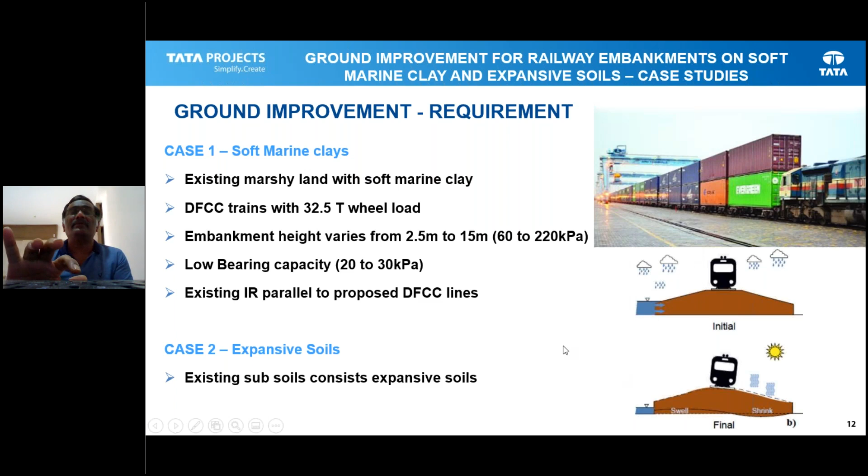The second case is how to handle an expansive soil. The soil is very hard during the summer, and in the rainy season it becomes soft and starts showing expansiveness. How to handle that clay.

One project we are presently working on is the DFCCI project in the Mumbai area, connecting from JNPT to Baroda across three stretches. This is around 104 kilometers where this red line shows the railway track moving on the ground. The entire Mumbai area's general soil profile consists of very soft marine clay followed by basalt rock.

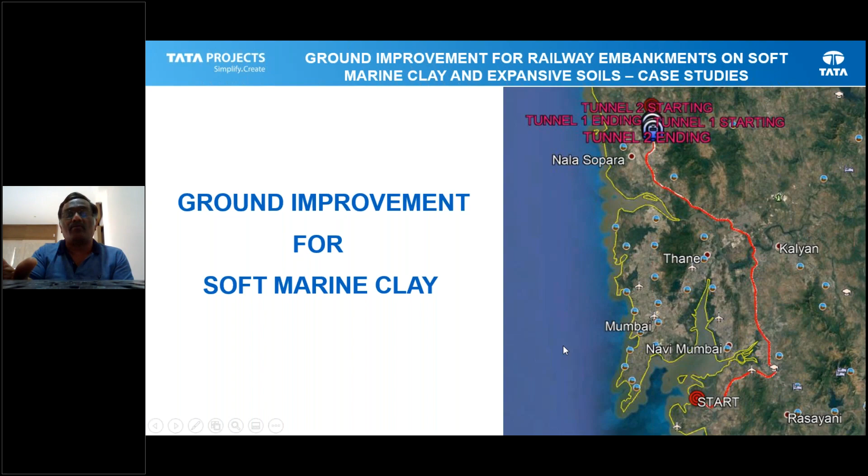The embankment heights we are talking about vary from 2.5 to 15 meters. The load coming from the embankment is around 5 to 15 ton per meter square, whereas the ground strength is not more than 2 to 5 ton per meter square, or 50 kilopascals.

So we found out what are the different methods of ground improvement available for us to handle the soft clay: ground improvement without admixtures, ground improvement with inclusions, and ground improvement with grouts and chemical admixtures.

As you are aware, without admixtures means either replacement, because we don't add any other components inside the ground, or preloading with PVDs, or vacuum consolidation.

Ground improvement with inclusions means we add additional material into the clay, thereby improving the shear strength and reducing the settlement. That is stone columns, sand compaction piles, soil nailing, and geosynthetics.

Ground improvement with grouts and chemical admixtures - which now, of late, we are getting these technologies in India - includes chemical stabilization, deep mixing, jet grouting, etc.

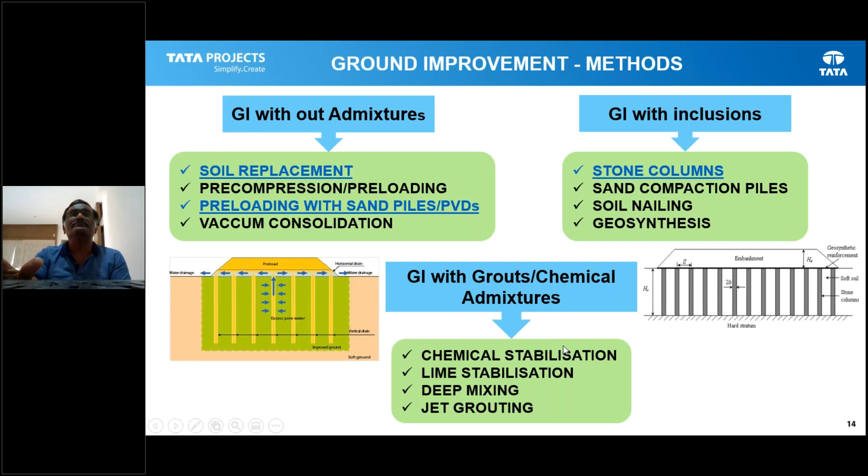So what is the method we adopted in marine clay? If the soil layer thickness is less than 2 meters, we have removed that soft clay layer and replaced it with good SQ1 material, which is a granular material.

If the depth of the clay layer is more than 2 meters - and one of the problems here is that our railway line of the DFCCI, the dedicated freight corridor track, will run parallel to the existing Indian railway line - the distance between the two tracks will not be more than 5 to 6 meters, and because of the space constraint it has to be as close as possible.

In that case, we have to go with a method that does not allow the existing railway track to settle. So we have chosen the stone column.

Where the DFCC track is going through a detour area where there is no Indian railway line, we have chosen preloading with PVD drains - that is, sand drains or wick drains.

So we have handled around 80,000 stone columns of length varying from 5 to 15 meters, and 4 lakh meters of PVDs varying from 8 to 15 meters.

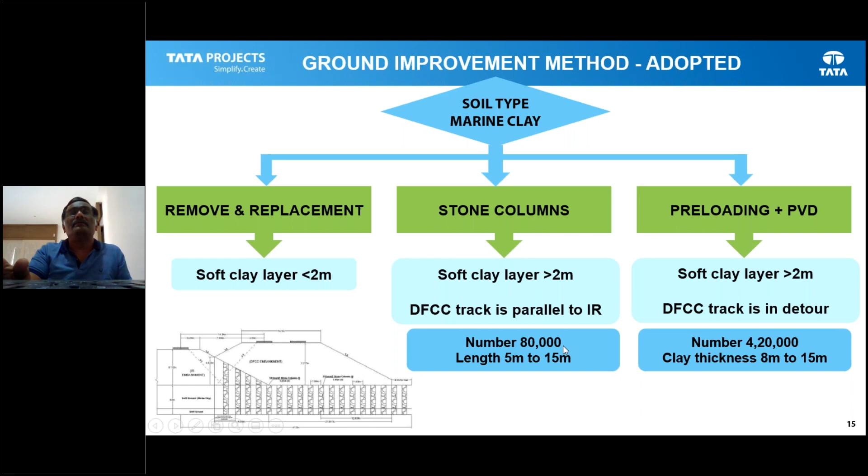So how did we design the stone columns? The entire process is split into four parts.

One is getting the subsoil profile from field investigation and laboratory testing. Then doing the design procedure for the stone column layout based on the loading coming from the railway track. And then next is the construction procedures and confirmatory testing, to check whether whatever design and execution was done is performing as per the requirement.

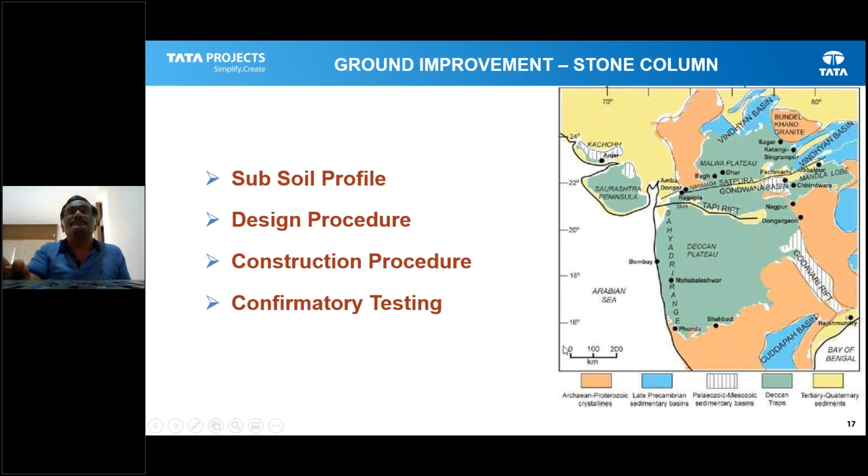Basically for soft clay, we know the property required is cohesiveness - the C value of the soil, cohesion of the soil. The shear test gives the cohesion directly in soft clays, and we can also get the C value from the N value. So as per the bid and tender requirements, we need to do one borehole every 250 meters, or at every structure location.

So we have done extensive investigations - almost 4 boreholes per kilometer, around 400 to 500 boreholes in total, and 50 vane shear tests were conducted.

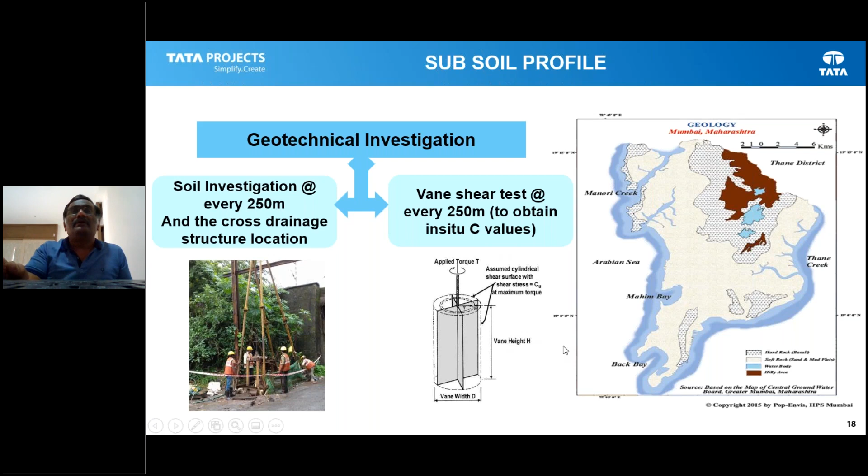The entire data is plotted horizontally based on the chainage - these are the borehole information showing N values, clay content, swell pressure, liquidity index, dry density, etc. You can see that the circled color shows the soft clay patches along the entire 100-kilometer stretch.

So the improvement is required only in the three areas where the soft clay layer is more than 2 meters, the N values are very low, and the C values are less than 20 kilopascals. The green line is the investigation bottom, and the boreholes are shown in red color. This is how we plotted the entire 100-kilometer stretch and identified which areas require treatment.

Yeah, it's just taking some time.

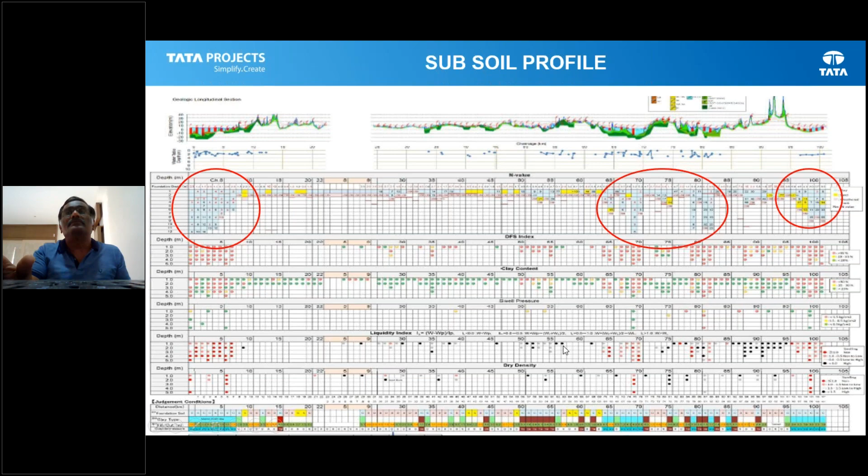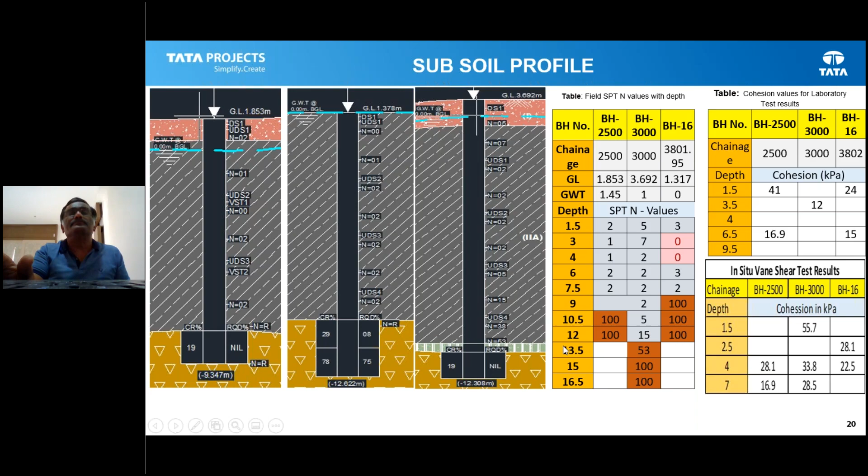Since the entire stretch is 100 kilometers, to arrive at the areas precisely where treatment is required based on the loading coming from the embankment, the ground profile, and properties of the soil, we have made a flow chart for the soft ground treatment. So when we should go for a replacement, when we should go for a stone column, when we should go for PVDs - this flow chart helps designers choose the type of treatment required based on the above said parameters.

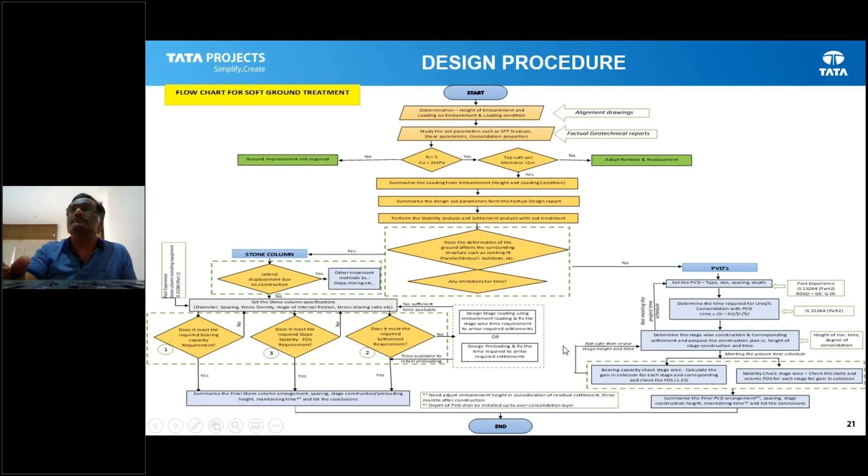Okay. So the entire design procedures are based on the RDSO guidelines GE G5, also IS code 15284. This is the stone column. The entire design procedure and guidelines are given in this code. RDSO also gives the guidelines based on this code, and some information is taken from overseas codes.

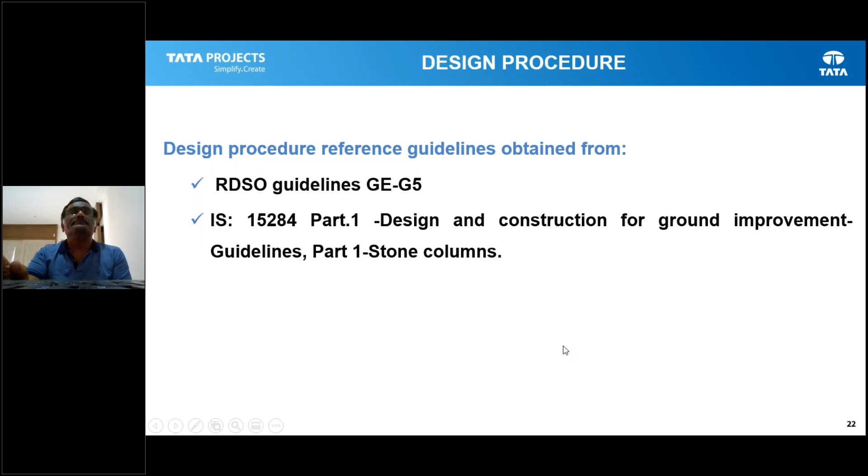So this is the typical embankment for any railway loading. 13.86 meters is the minimum width required for the two tracks going parallel. Below the rail track, we have ballast, below the ballast a blanket, then subgrade - SQ1, SQ2 as we call it - then the embankment material. The top thickness will vary, 1.6 meter will be the blanket and subgrade, and above that there will be rail height, some 350 to 400 mm.

So the entire loading calculated from the live load from the track, ballast, blanket and subgrade load comes around 56.4 kilopascals for a 2.5 meter height of embankment. If the soil is able to take this load, there will be no treatment required. If the cohesive values or shear strength parameters are not supporting this load, we go for the treatment.

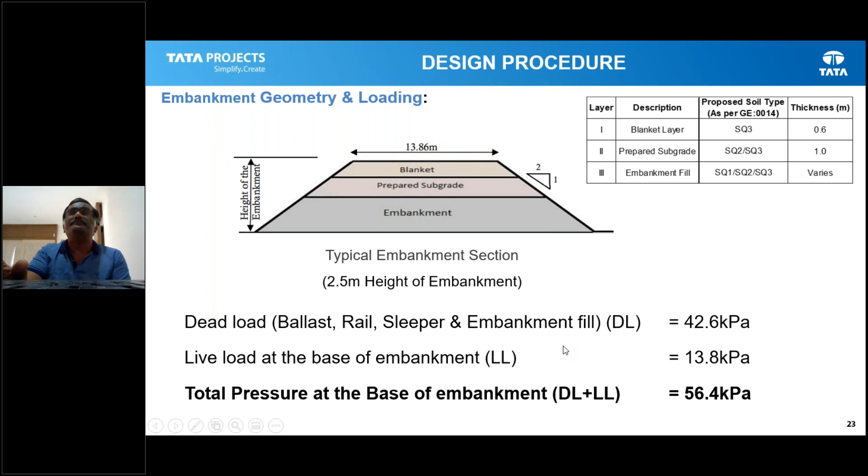So this is the typical embankment sketch with the stone column spacing and depth, and the blanket layer is for draining any pore water that comes to the top. It acts like a drainage layer to drain out the water.

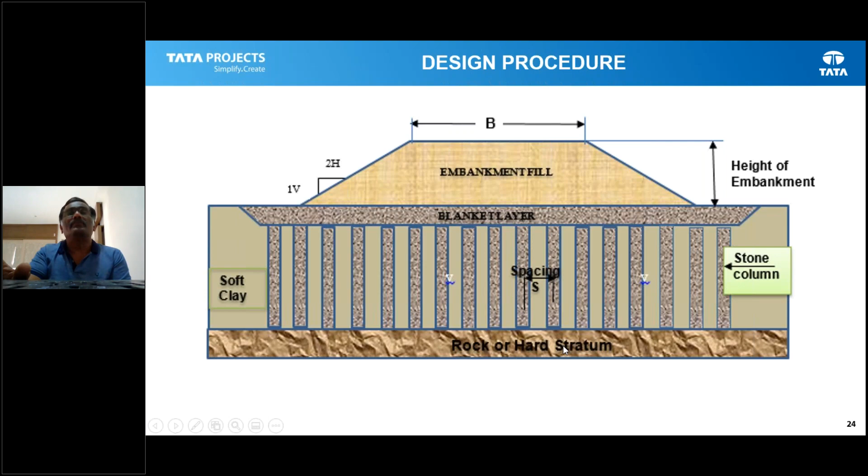Most of you know how the stone column will take the load. It basically takes the resistance offered by the surrounding soil for the bulging. Then the capacity of the stone column results from the resistance offered by the surrounding soil due to the surcharge. These are all basic principles of the stone column, how it takes the load. Based on these three criteria, we arrive at the diameter of the stone column, spacing and pattern - whether it's a triangular or square pattern based on the load that is coming.

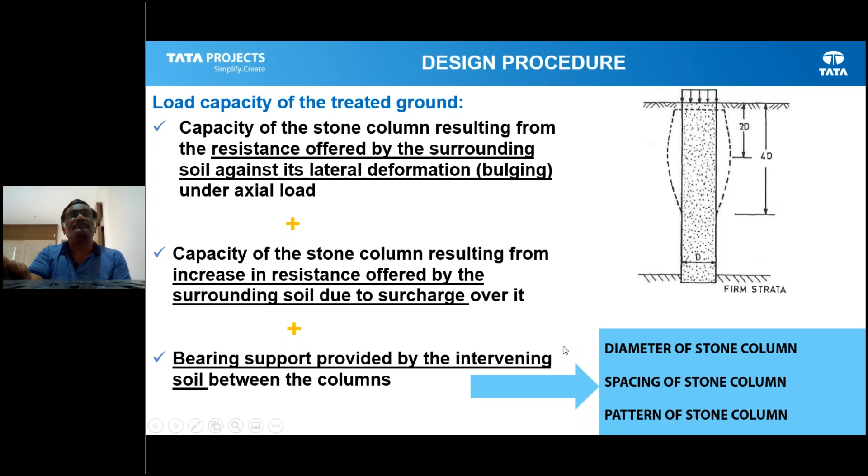So how we did the design process is we chose a 900 mm dia stone column, final diameter. Depth of the stone column varies 5 to 15 meter based on the soft clay layer thickness, and we chose the triangular pattern because the loading is high, so we need closer spacing. Minimum spacing is 2D, it may go up to 2.4 meter. We have gone wider wherever loading is not much and strength of the clay is more. Bearing capacity improvement achieved is 60 kPa to 220 kPa.

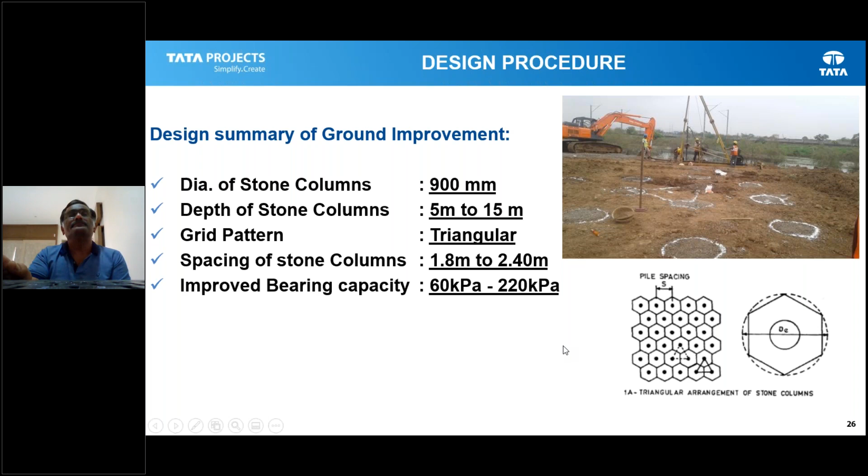So when we do this design, we need to perform the slope stability of the embankment for the live load and the dead load coming from the embankment material. If we don't treat the ground, what is the result of deformation or settlement? You can see that green patch having very high deformations with a factor of safety less than 0.838, because the shear strength of the clay is not enough to support the embankment load laterally or passive resistance. Once we treat with the stone column, this factor of safety has improved to 1.916 and there is no failure - slope stability is achieved.

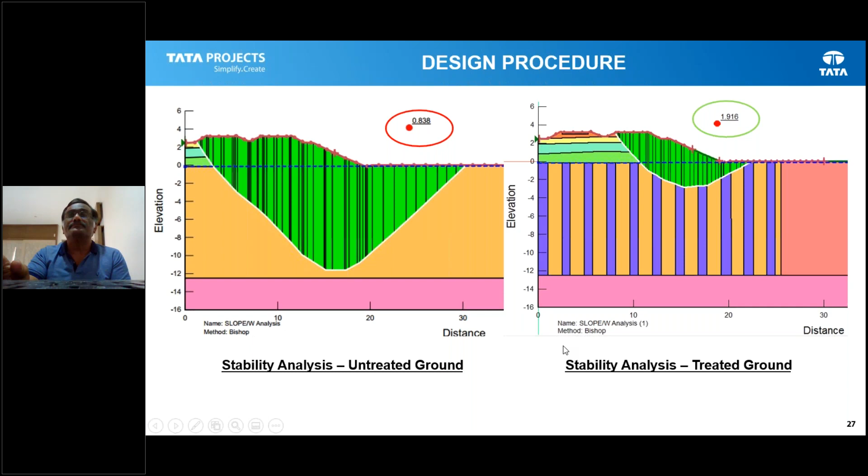As the stone columns have to be done very close to the existing railway track, where every 10 or 15 minutes one train moves on the track, the vibration of the equipment we are using while installing the stone column inside the ground should not disturb the existing railway embankment. So we have chosen a method taken from New Zealand, Macmillan patented technology - vibrationless stone columns. It is brought to India by Sarita Infra. They are the certificate holders, so we have used their services to do this job.

So what is this method? Actually, the stone is fed at the bottom of the hole, and the torque required pushes the stone laterally, thereby making a stiffer column. The advantage of this system is that it will laterally compact and also vertically compact the stone for the enlargement of the stone column.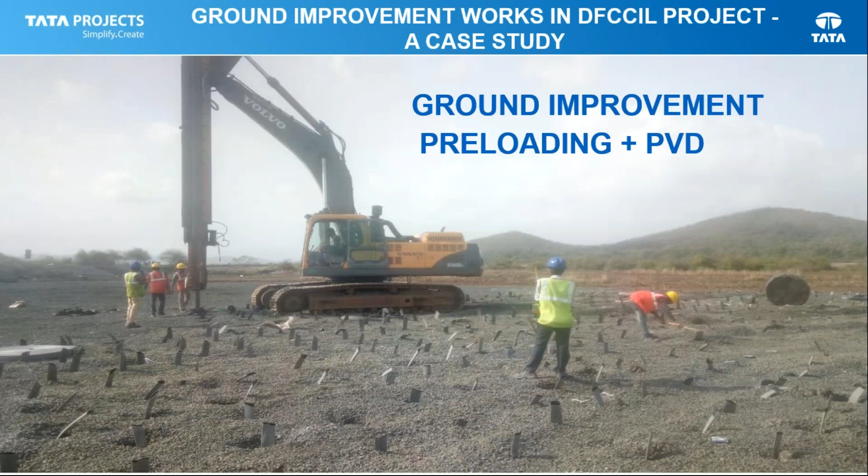So the next one we have used in the same project is the PVDs. Wherever the embankment or railway line is going in detour, away from the Indian Railway lines, we have gone with preloading of PVDs. So first we do the PVDs, then we do the preloading to achieve consolidation and settlement so that embankment loads can be applied directly.

PVDs are used in detour stretches, as per IS 15284 Part 2. Allowable settlement after construction is limited to 100 mm. Preloading time and height is the most crucial calculation for geotechnical engineers - how much time is required to achieve consolidation in soft clay based on drain property and preloading. That is a challenge, and it has to be monitored at site to see whether we get the same results as predicted theoretically.

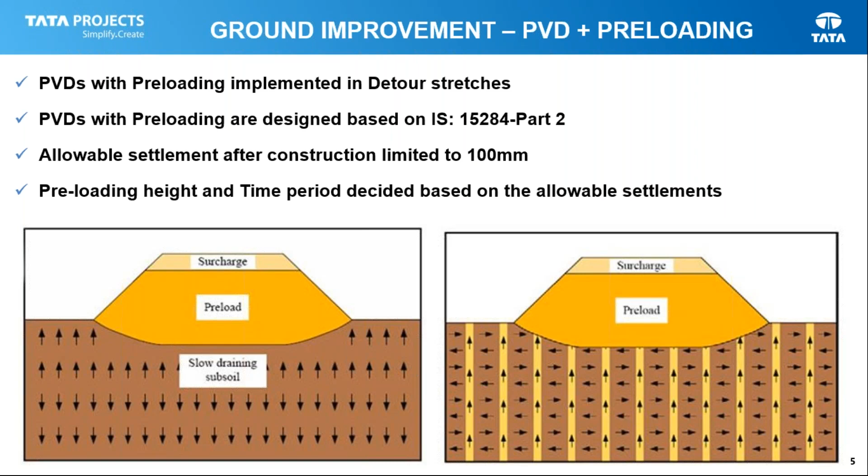So what we have used is a TechDrain, 100 mm by 4 mm wick. Thickness of clay layer is 8 to 12 meters, triangular pattern, spacing of 0.9 meter. Preloading depends on the height of the embankment - it is calculated and given. The preload duration is restricted to 3 to 4 months.

You can see the process of wick drain installation. The machine has a mandrel, and the drain along with the mandrel is pushed inside. Then the drain is left inside but the mandrel is withdrawn. Then the drain is cut and the wick drain is installed in the ground.

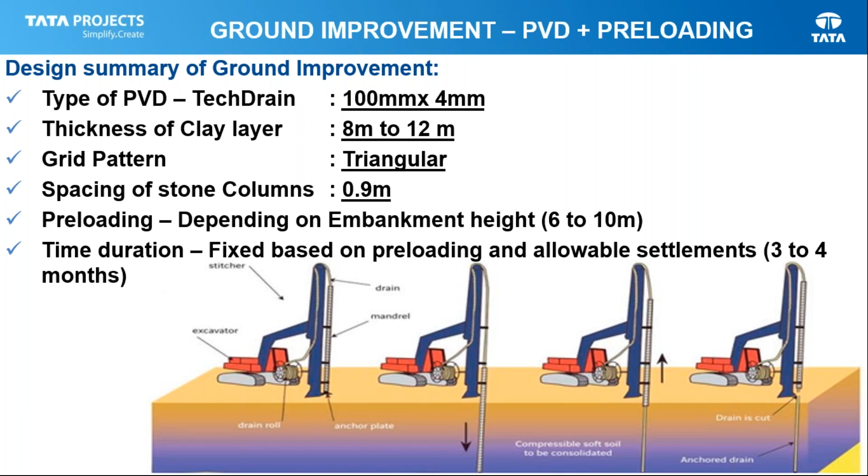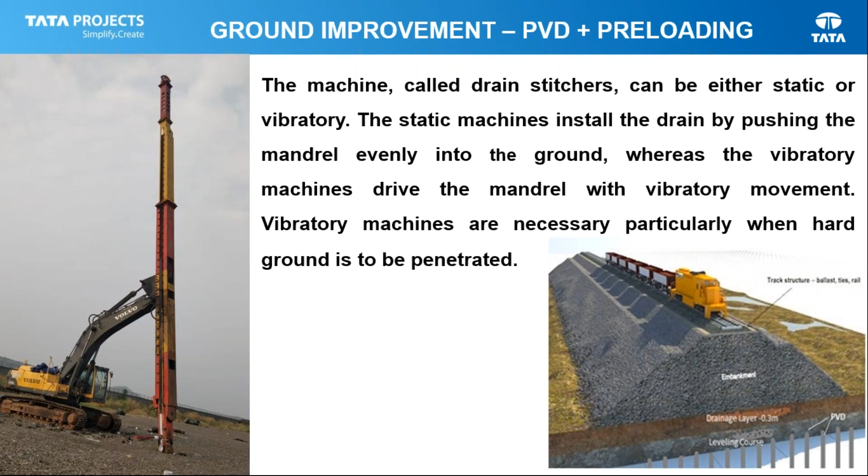You can see the wick drains after installation. Then the preloading material is being brought in.

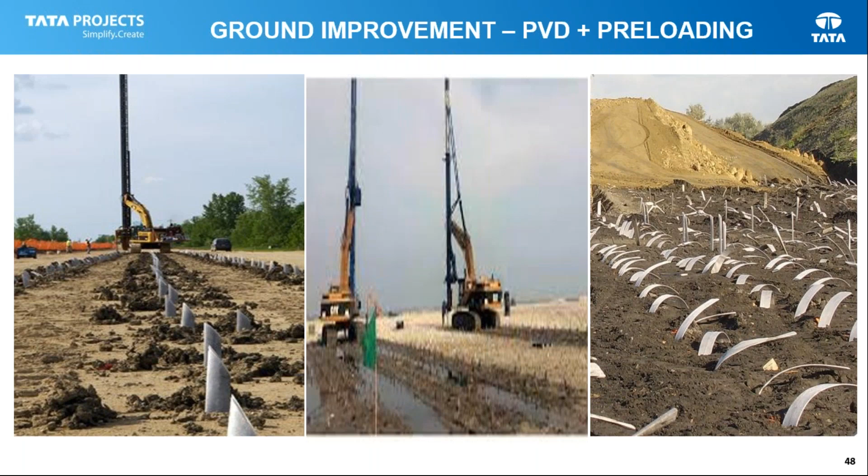So this is the installation process - make the ground clean and remove any debris. Then place SQ1, what we call granular material for the embankment, 0.3 to 0.5 meter, to make a platform for the movement of equipment. If we don't put this layer, the clay layer has a tendency to shear off and the equipment cannot move freely. So we need to bring this material which will take the load of the equipment.

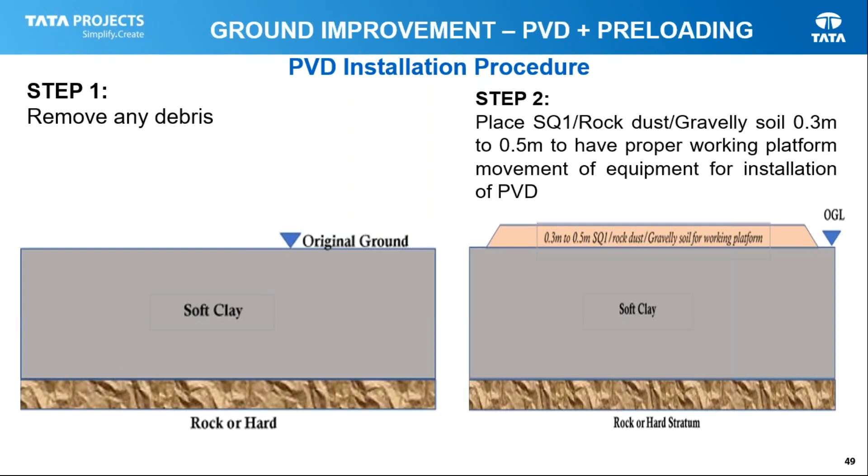So this is the base width of the embankment, and based on the embankment width, the wick drain spacing and extent is decided, along with preloading time. Preloading is done in stages based on clay strength achieved, based on consolidation time period and percentage of consolidation. After consolidation settlements are over, we start putting the blanket and then the final track.

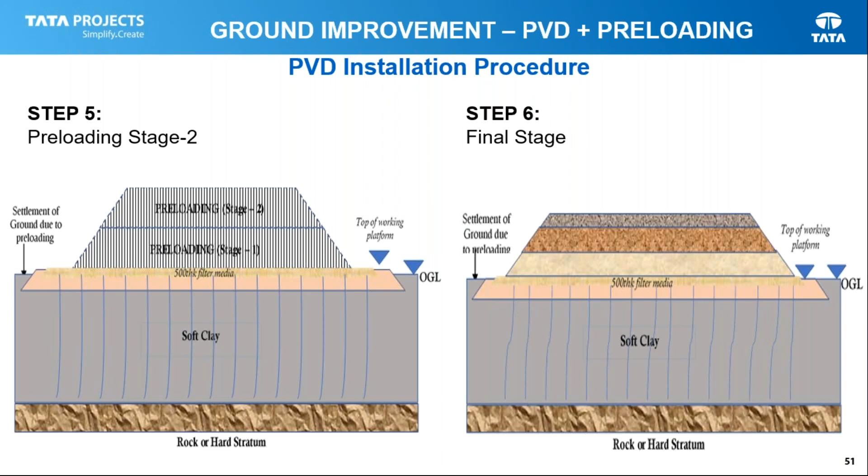Field monitoring is very important in case of PVD drains, whereas for stone columns it is not required. Stone columns totally modify the shear strength parameter by pushing material into the ground, whereas here we are only putting a drainage material inside the clay. By preloading, we are removing water from soft clay, thereby speeding up consolidation and increasing shear strength. So field monitoring is very important.

Generally we do two types of testing. One is piezometer to monitor pore water pressure. Second is settlement gauges and recorders to see how much real ground settlement has taken place. We have used Casagrande type piezometers.

This is a typical cross section which you all would have studied - the standpipe, PVC standpipe, with piezometer inside to see water level variation over time. We have used around 4 numbers each at 5,000 square meter area. Settlement recorders - 10 numbers - are provided at 2,000 square meter area.

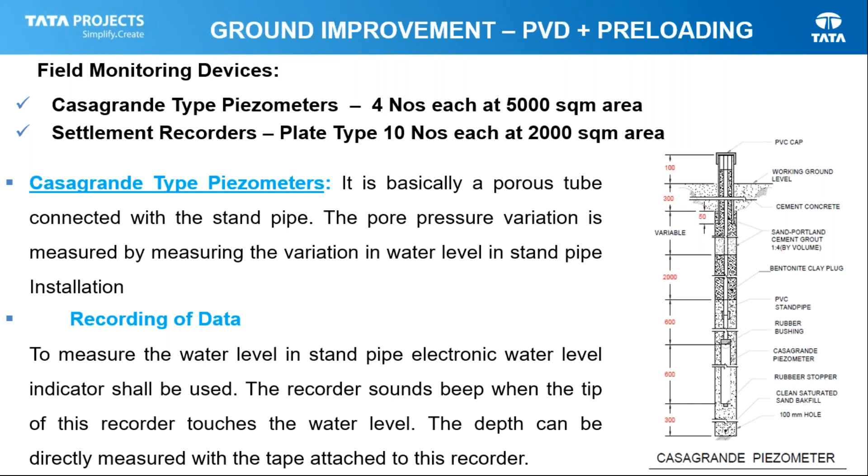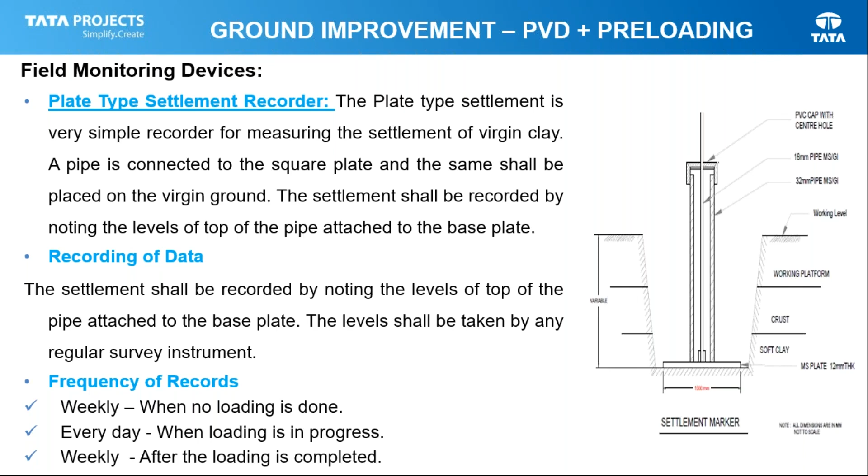The settlement recorder is a plate type, and the monitoring frequency is weekly, sometimes every day when loading is in progress. There is a process and procedure laid out to monitor these settlements.

So this is regarding the ground improvement methods - two methods which we discussed, one is stone columns, the other is PVD drains. Now, the same clay can have an expansive property because of the montmorillonite mineral present in it - when it comes in contact with water, it expands, thereby giving cracks to the ground.

So how do we handle it if the embankment is passing through expansive soils? What type of treatment do we need to give, and how do we handle this? We encountered this problem in the Baroda area, where most of the land where the railway line passes is of high expansive soil nature. There is high plasticity where liquid limit is high - we know that we will get expansive nature.

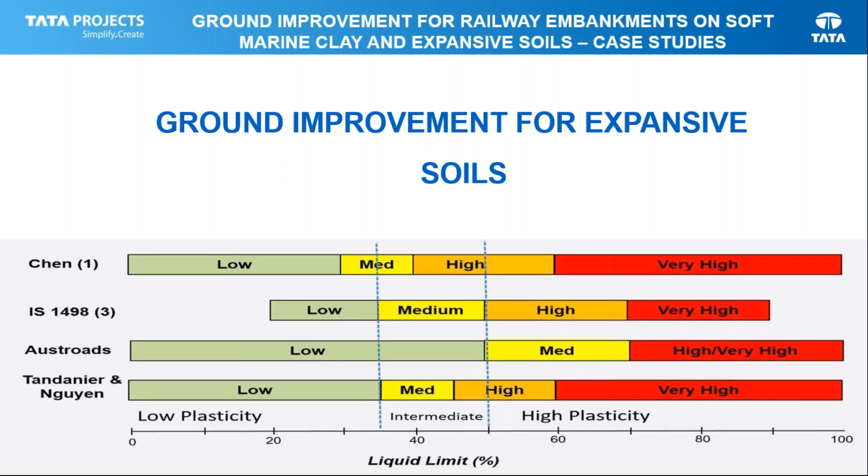We can see how initially the embankment, subsequent to the rains, shows expansiveness, and the entire embankment swells on one side and shrinks on the other. Thereby we get cracks and failures. So how have we identified the expansive soils, and what sort of treatments have we used in these areas?

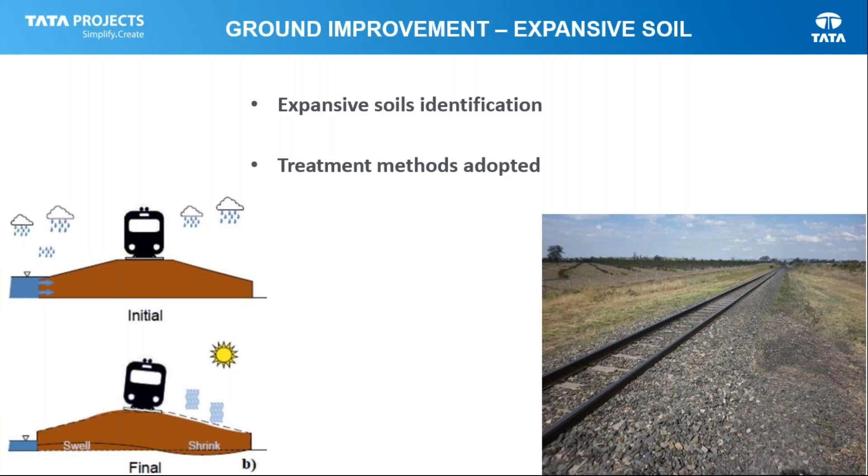So we can see most of these areas are from Surat to Baroda, where the fields have highly expansive soils. So how do we identify an expansive soil? The swelling pressure is more than 0.5 kg per centimeter square, clay content is more than 25%, and differential free swell index is more than 30%. These are the three parameters we should study before arriving at the treatment requirement.

Once the differential free swell is more than 50%, it is a very high degree of expansion. So as per the requirement for railway embankment design, if differential free swell is greater than 30, we need to replace that earth with CNS material.

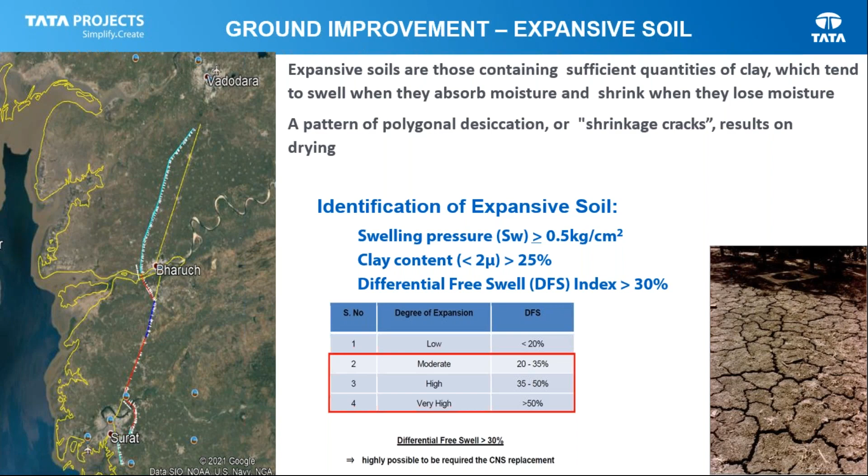Similarly, this is also a 130 kilometer track length, where we have done boreholes at every 250 meters and identified the potential areas where expansive soils are available. Based on the three criteria shown in the earlier slide, the entire stretch is classified into different areas for treatment processes based on the expansive nature.

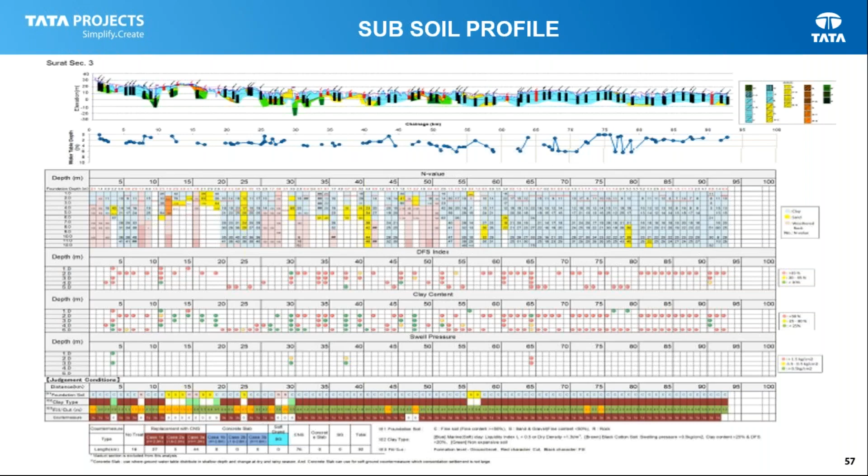There are two or three methods available in India now. One is, if we don't want to do any treatment, it's better to replace the entire expansive clay thick layer in the ground, bring new soil, fill it, and compact back. Or giving lime treatment is also one possible method. The next important method, which we use everywhere in India for irrigation channels or canals where expansive soils are present, is using a CNS layer - cohesive non-swelling soil. This was developed long back by Professor Katti with his vast experience in CNS and expansive soil study.

So we have used CNS layer or the replacement method in most places. Lime treatment was not used, even though it is possible, because the cost of the treatment is very high.

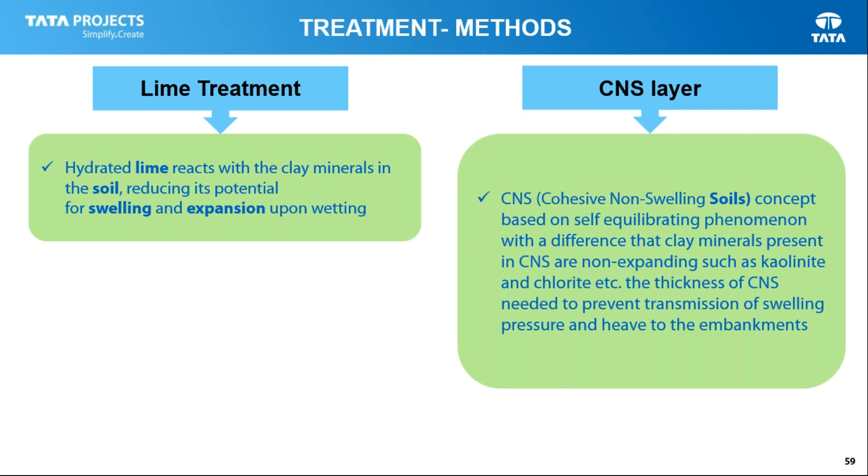So this is the process we have followed in our design. One, if expansive soil is less than 2 meters, it is cheaper to excavate 2 meters and replace with SQ1 material or granular material. If the expansive soil layer is more than 2 meters and swell pressure is more than embankment weight - because if the downward weight is more than the upward weight due to swelling pressure, then nothing will happen to the embankment.

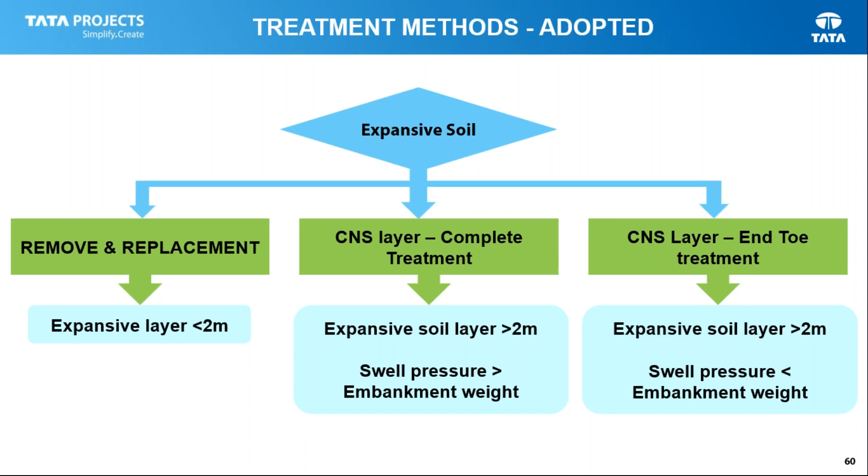So only at the ends we need to treat the soil so that there will not be any moisture variation. That is the third point I explained: expansive soil is greater than 2 meters, swell pressure is less than embankment weight, and only we treat at the ends.

So what is the thickness of CNS layer required is based on the swell pressure of the soil. There is enough literature available - based on 50 kPa to 150, we can go up to 75 centimeter thickness, and 850mm based on the swell pressure variation.

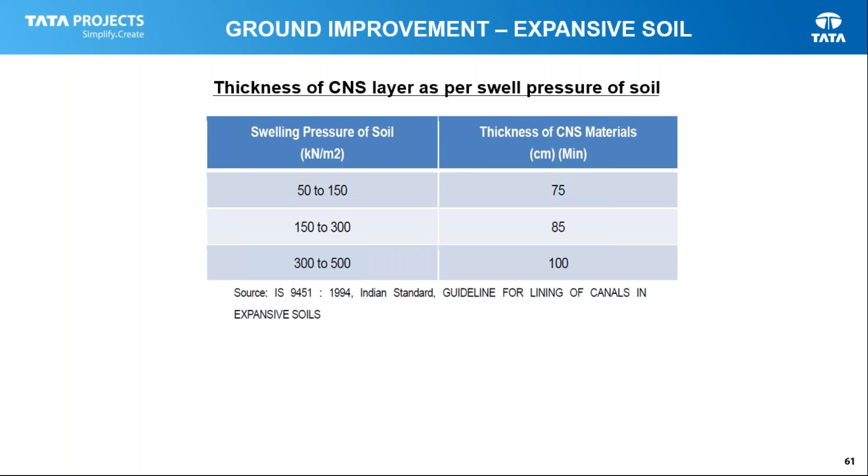These are the properties of CNS layer which are available in all literature, and we have followed as per the IS codes and CNS properties.

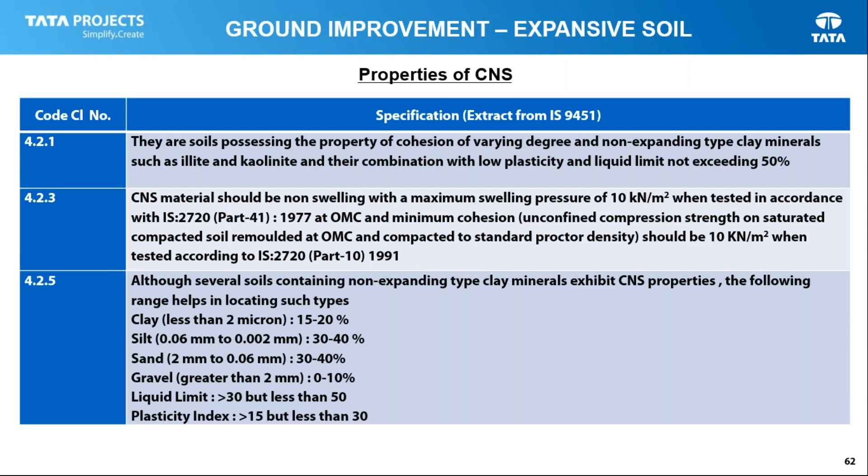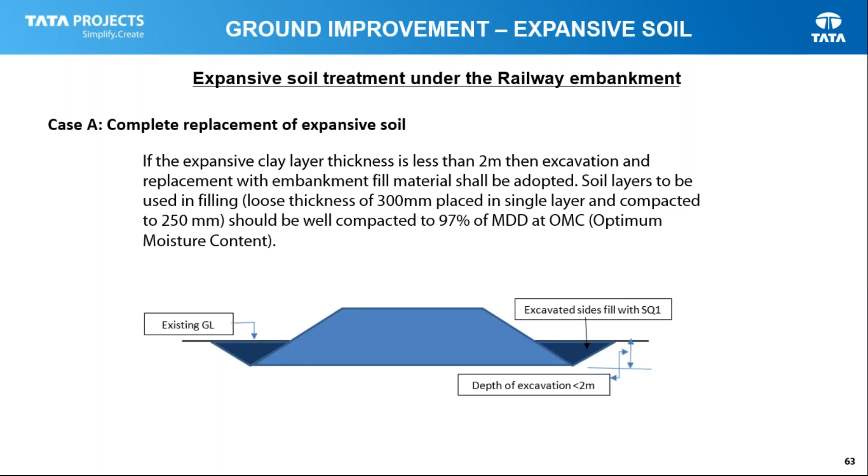So we have made a complete replacement of expansive soil if it is less than 2 meters. If the depth of excavation is less than 2 meter clay thickness, we have excavated 2 meters and replaced with granular material, compacted back up to 97% MDD at OMC.

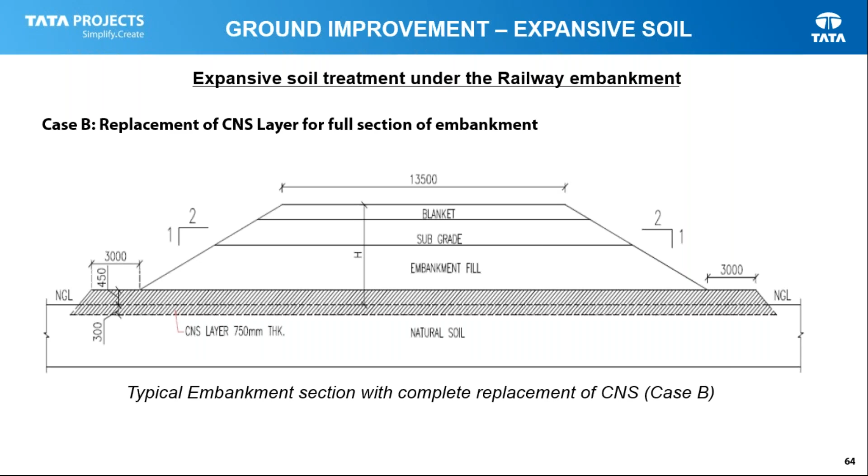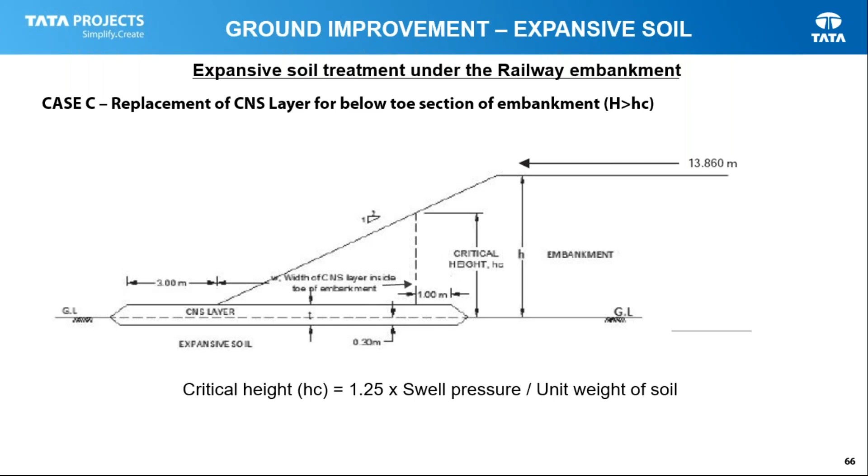This is the end of my presentation on the 3 case studies, 2 project case studies, with the improvements we have made in our projects. I can take some questions.